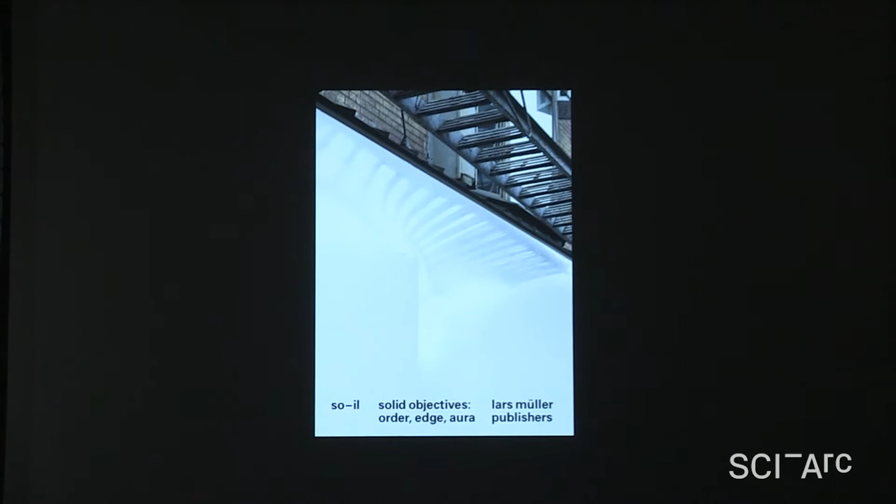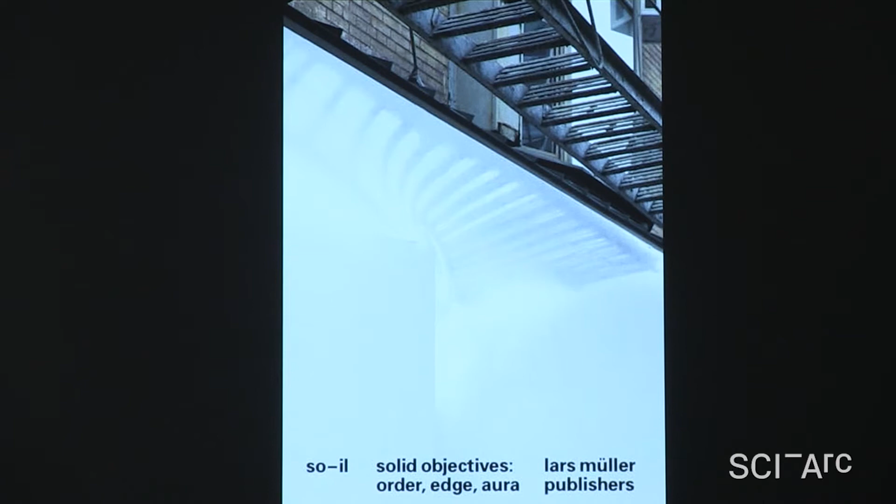We indeed started the office with Florian and me, from different cultures, and now we are running the office with a third partner, Ilias Papageorgiou. And so with 3 people, it's inevitable that we're getting into a lot of discussion. We actually have some of our former staff here, and they can attest to that. Argument and disagreement are part of our everyday life. So indeed, it took us about 3 years to make this book called Solid Objectives: Order, Edge, Aura. SOIL stands for Solid Objectives, Idenburg Liu, and you can say SOIL or SOIL. It's completely up to you.

So the title of this book takes the solid objective, the first part of our name, that hints towards a certain projection and course that we set out to do 10 years ago when we started our office. So in a way, it's a manifesto and birth cry. We did not redraw anything in the book, so we pretty much dumped everything that we did in the last 10 years and tried to make sense of it. So hopefully you have a copy here in the library, and if you have the time, maybe flip through it. I would love to hear your thoughts.

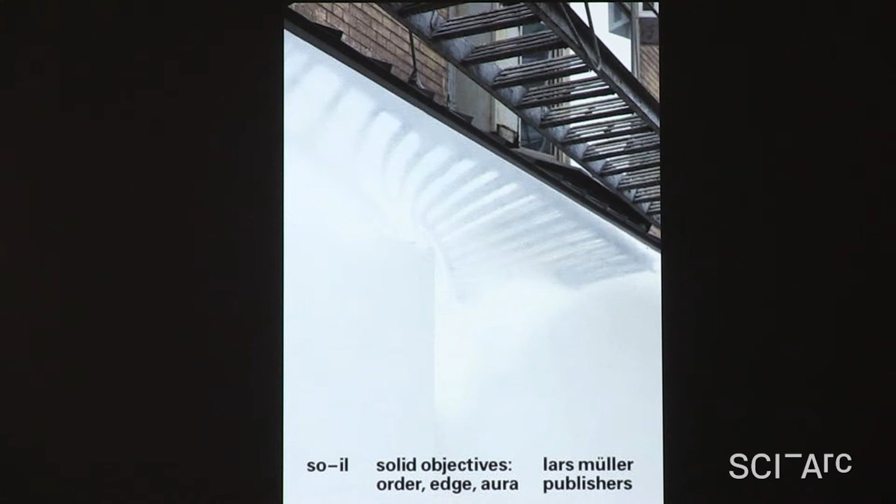Let's see. I put this image in as the start of today's talk because I came to a school that, of course, is very well known for digital literacy and has been at the leading edge of digital technological innovations in the field for a very long time. For us, we started our office in 2008, when the height of the first generations of digital exploration had already gone and entered into a new phase in this development, and also in a moment where there was a financial crash and we were all confronted with the consequences of this speed of information.

So as information and communications are transmitted ever faster, at a speed that's approaching light, we decided to contemplate, instead of what would happen if we take this to the extreme in the sci-fi sense, at least for now, how architecture, this incredibly still tactile and idiosyncratic space, shapes the reality of that particular time and space.

And this is the territory of architecture, at least of today. And this landscape is also incredibly fragile and vulnerable. I think Frank Gehry said a couple years ago, and he did give the middle finger in his lecture at the same time, that 98% of everything that's being built today is pure shit, and there's no sense of design, no respect for humanity or anything else. They are damn buildings, and that's it. And I think there's some truth in that.

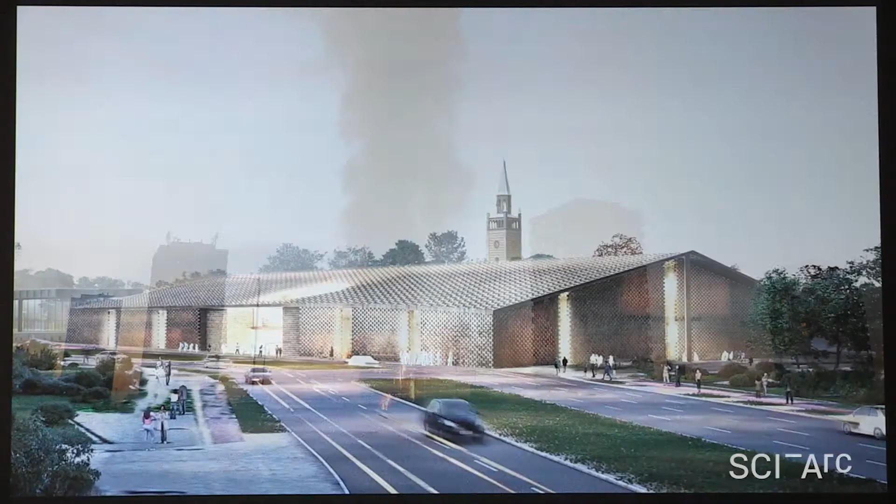Transparency is not the truth that we are dealing with every day, and pure mathematics is not the truth, and extrapolation is not the truth. Every day we stare at the truth in front of us and can't believe that it is so. There's no formula to predict it. And as the introduction rightfully put it, unsettled and anxious, many architects turn to nostalgic, romantically reviving the fads of the past. Apparent simplicity and this early modernist idea of material democracy often become the default to practice in today's instabilities.

So we, in kind of retrospective, looking at the work we've done and trying to figure out what's the territory of our practice, in a broad stroke outlined those three territories: order, edge, aura. And with order, we try to see the plan beyond this operational manual as something that's less determined and more catalytic. And the plan becomes, in this way, an enabler, a device that calibrates relationships, a tool for the production of spatial events. And we try to incorporate elasticity and accommodate contingencies, even in this case, in a Cartesian grid.

This is because to date, the discipline has largely, and in a modernist sense, denied or attempted to escape these contingencies through a retreat to the notion of legibility or efficiency. So we believe that architecture needs to try to incorporate the contingent presences and to revert this overtly reductive approach.

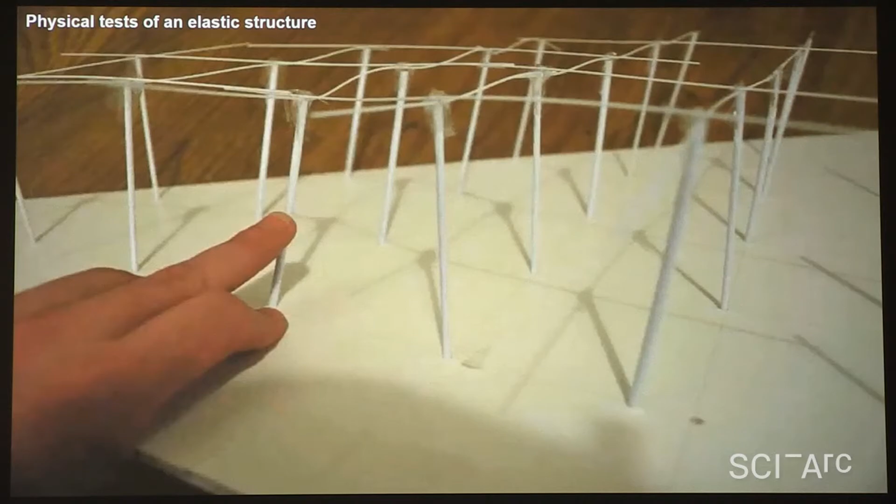The edge, of course, means a little bit of the encounter towards an architectural space that's definitively considered, and there's some intention to it. And we believe that the edge and the frame is very much at the core of the architecture practice. It's the moment where a spatial intention gets transformed. I think at some point in art history, artists have understood that the same piece of artwork can be seen quite differently, depending on what kind of framework is put over it.

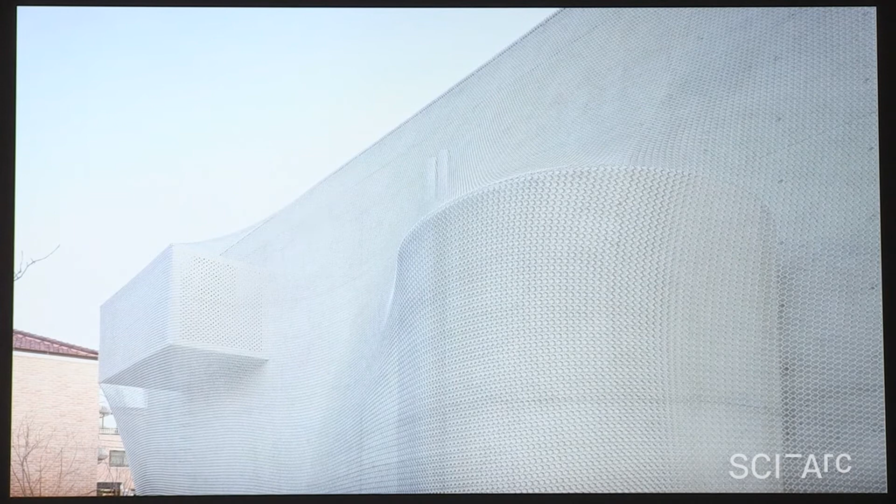I think a lot of the contemporary artists try to not have the frame at all, but in our projects, we try to consider that edge and contemplate that and make it into a productive territory of investigation. And it's a creative act for us, and this boundary that's delineated allows us to incorporate multiple narratives and multiple versions of imaginations all at once when someone encounters that space.

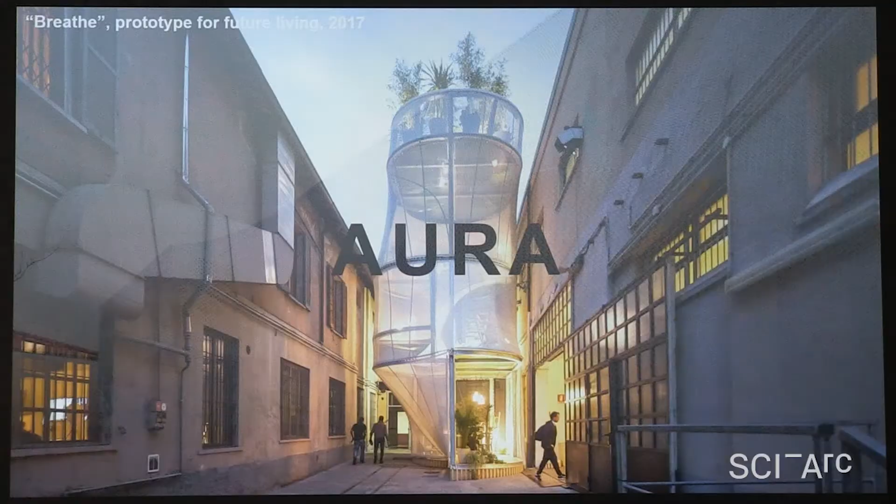And the third territory of investigation is aura. This is, of course, a much debated term when we were choosing if it's about aura, if it's about beauty, if it's about aesthetics, if it's about the character. We chose the word aura because it is, in a way, a very unfamiliar term in the architecture field, and it somehow embodies both an aesthetics and also the characters. Our first installation, which you saw before, of the pole dance, very much referred to Oskar Schlemmer's pole dance from the Bauhaus period.

We believe that these abstract figurines and these kinds of personalities that are embodied in his works can be very productive in establishing interrelationships between abstraction and compression in the architectural space that we create. And objects and architecture who have personalities can help us to communicate and also embody political agencies that are very important to communicate through these shared spaces.

And as we increasingly occupy the available areas on this planet and share them, it's inevitable that we demand our volumes to not address only functional needs, but also narratives and fictions, so that we may inhabit a more joyful and characterful world.

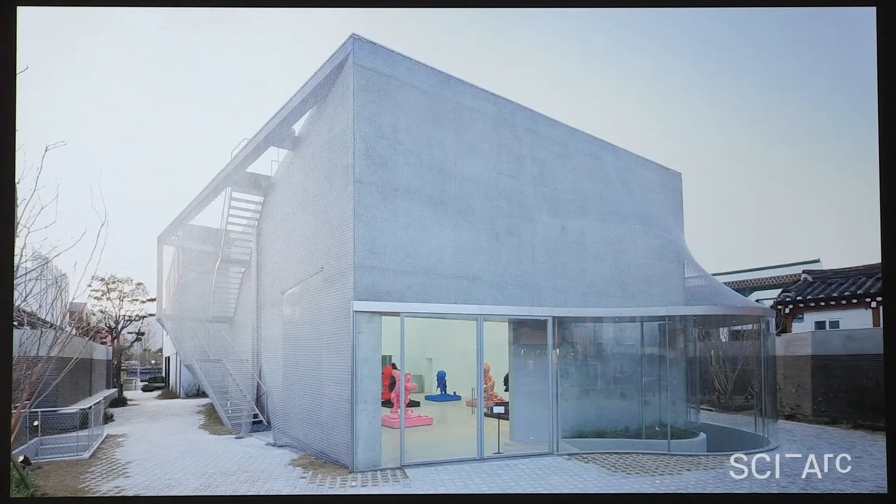So with that introduction, I'm just going to show you 3 projects from some of the earlier projects. This is the Kukje gallery that was mentioned before. And you can see here that it's the first time that this character as a building emerged for us. And I hope that the story of making them would also show very much how the people who make it, the people who we argue with and eventually became the supporter of the project, is very much part of the story.

So this is a contemporary art gallery in Korea, and the site is in one of the most historical neighborhoods in Seoul. It's literally across the street from the Imperial Palace. It's a contested area where a lot of these Hanok buildings you can see around the site, all 1 story tall with masonry foundations and timber structure above, occupy that entire neighborhood. It's very close-knit.

Everything is very intimate. And then in recent years, with this kind of global art market invasion into this neighborhood, there has been a big contested political background to add to the foundation of this project. Our client was an art gallery. They wanted to make the biggest possible gallery box, functionally speaking, in this neighborhood.

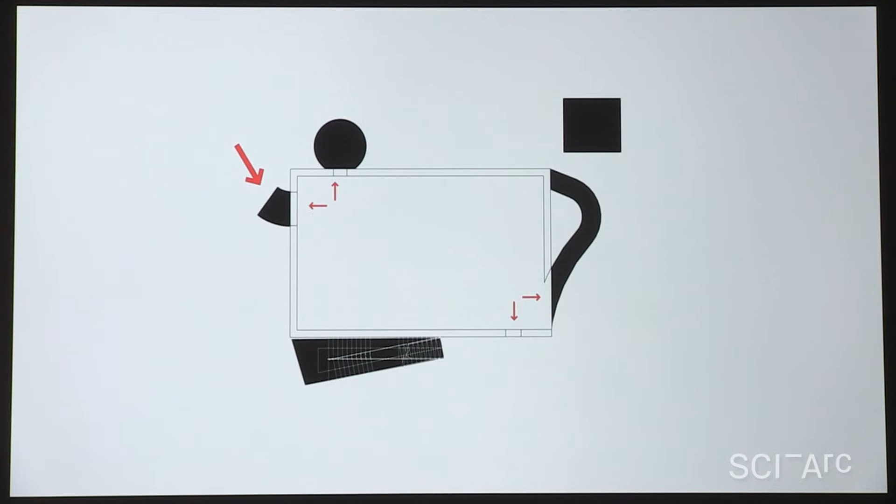And still this, although characterful, still had a harshness and a little bit of awkwardness in the neighborhood. So we thought, how can we soften this even a little bit more, and create some of the tactility that these older buildings embodied as well, but not to rehash that and not to copy that, but to approximate the same aura in a way.

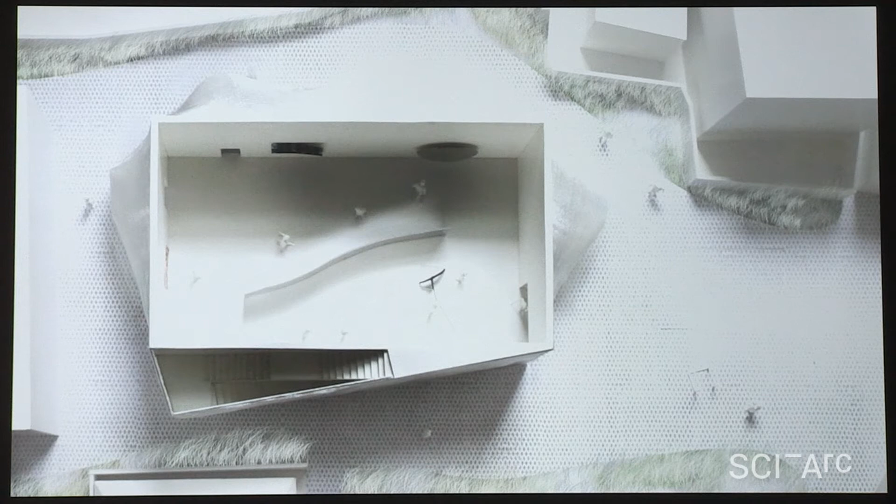So in our first exploration, we wrapped the entire building with this stocking material, which was very elastic, and it created these double curvatures and softened the concrete volumes through its sheen and elasticity. The client, of course, had been working with a lot of artists, so crazy ideas were not very foreign to her. So she liked it immediately when she saw this model, but didn't even ask what this stocking material was.

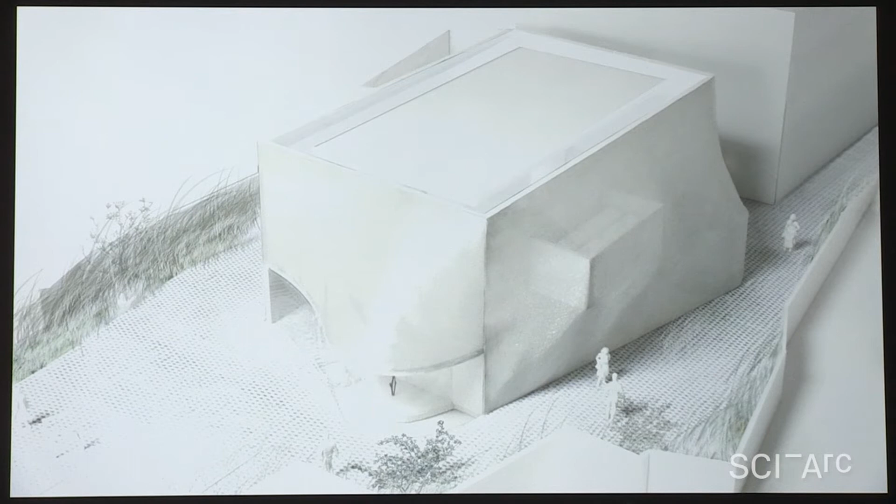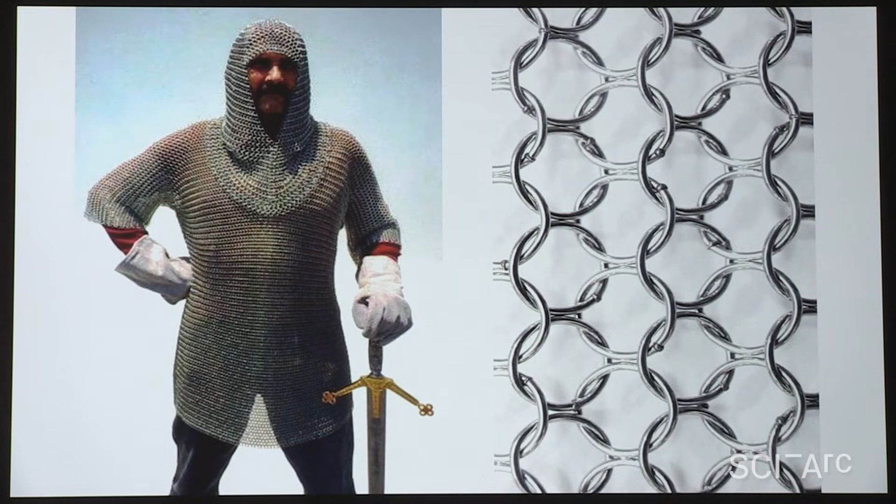So we had to figure out what this soft and seemingly immaterial envelope was going to be. And that answer came out of a trip to the Metropolitan Museum with my kids. She was studying medieval history, so we were looking at the armor there. Of course, this is not the one in the Metropolitan Museum. But we thought, this is the similar thing we're trying to achieve: something very simple, but through the aggregation of a very small unit, through the way they're interconnected, elasticity can be achieved, while the material itself is still very strong and viable for architecture.

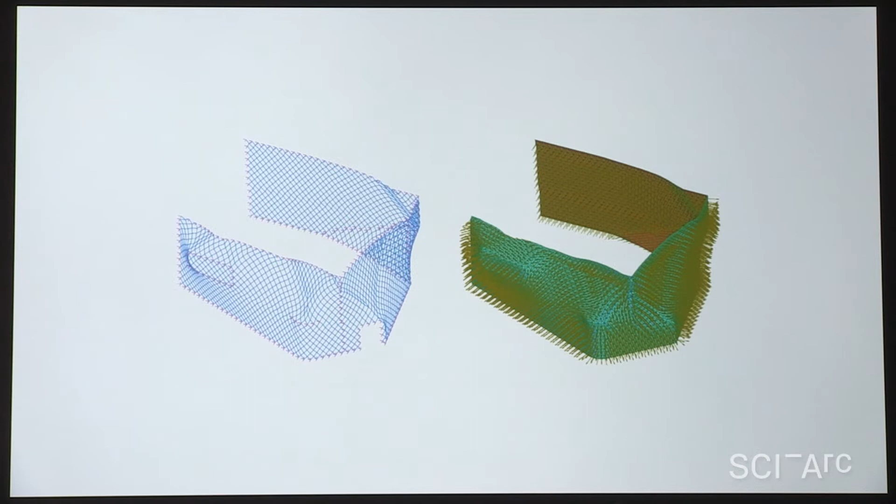So we started to experiment. Of course, this doesn't exist in your spec book or off the shelf. So we started to investigate its possibility through working with engineers and material laboratories, looking at the tensile strengths and the breaking points of a welded stainless steel ring, and we mapped that all in the computer, simulated how the stress force would work over the entire building, and learned so much hypothetically, through formulas and mathematical principles, about this mesh.

So it seemed very real in a computer, but we still didn't believe in it, and we wanted to see how it really behaved. So we ordered from an Indian belly dancing supply company this big stainless steel metal mesh for a 1 to 10 model in our office, and immediately you see the wrinkles and the difficulty of draping in this model. But it was still a very comforting process.

But we also realized that this is 1 to 10, so if you scale it up 10 times, inevitably there are many other installation complications that will come into play. But with these kinds of things, we always try to solve the problems one step at a time. So first we figured out conceptually what it would be, and then digitally how it would potentially perform. And then through the 1 to 10 model, surface some of the problems that might occur.

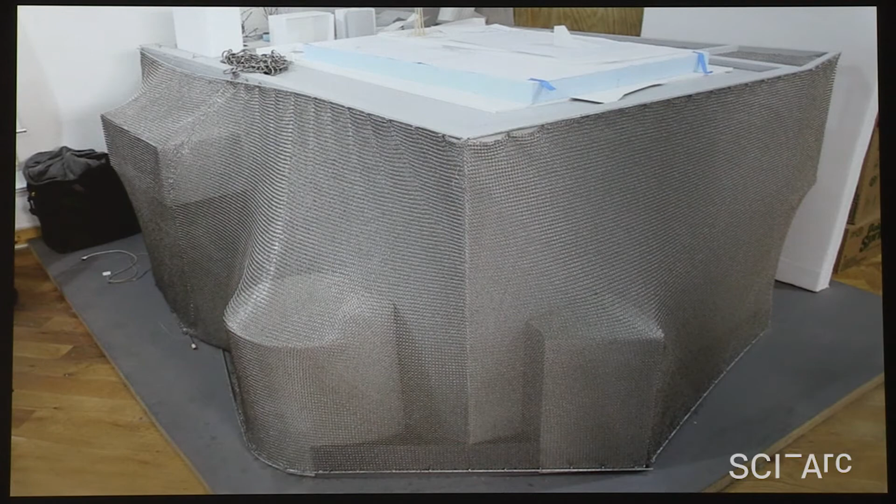And then that's the moment that we go to the market, in a way, and go to the world and try to figure out who can actually go on such a crazy trip with us. And Alibaba at that time was still a new thing.

My father was a trader in the 80s, trading all kinds of stuff between China and Japan. And he lost his job in 2005 precisely because of this kind of portal-to-portal business. So for me, it was a little bit of a betrayal of my father to be using Alibaba. But I saw the potential of it, and we went on Alibaba and saw that there are so many factories just eager to show themselves and exhibit their skills.

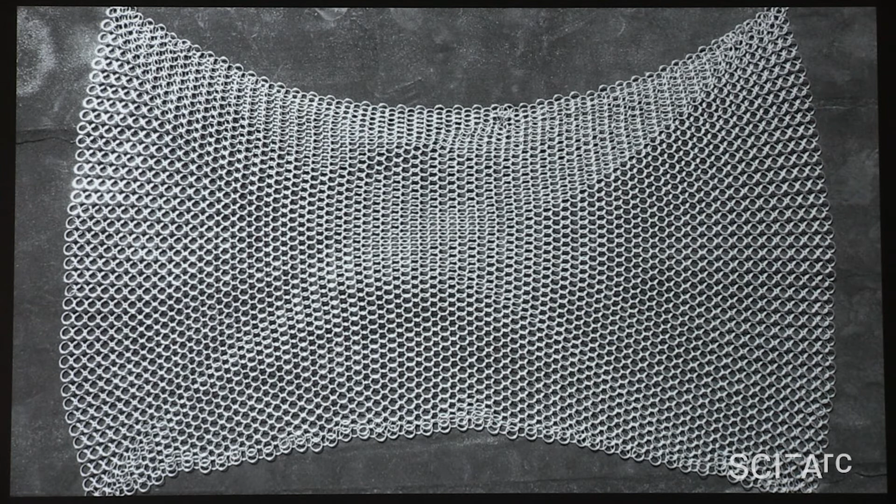And we found that there's a town in China that had 2,000-something factories that all produced stainless steel materials, mostly for oil refineries. So architecture is something completely unknown to them. And we started to chat with one of the companies, and they were very eager and sent us this sample immediately, which again was a very big step forward into this unknown territory for us.

This was, I believe, about 3 meter by 1 meter, or 2 meter by 3 meter size, completely hand welded, because the material for belly dancing is made by machine, and they're all butt jointed. So to scale it up to the scale that we needed for the tensile strength, it needed to be hand welded. So at least looking at this, we thought, okay, this is possible.

Then we decided to go visit the people who would be making this for us. And we arrived at this village, and we realized that this is not really the so-called land of stainless steel mesh, but really a factory town without any social infrastructure, and it's 2,000 not factories, but workshops, because the factory that sent us the sample was in this kind of setting, with trees coming out of the welding tables. And literally when we arrived, we saw how they were welding our stainless steel, just having a bunch of rings in front of them and doing one at a time without even glasses, as you can see.

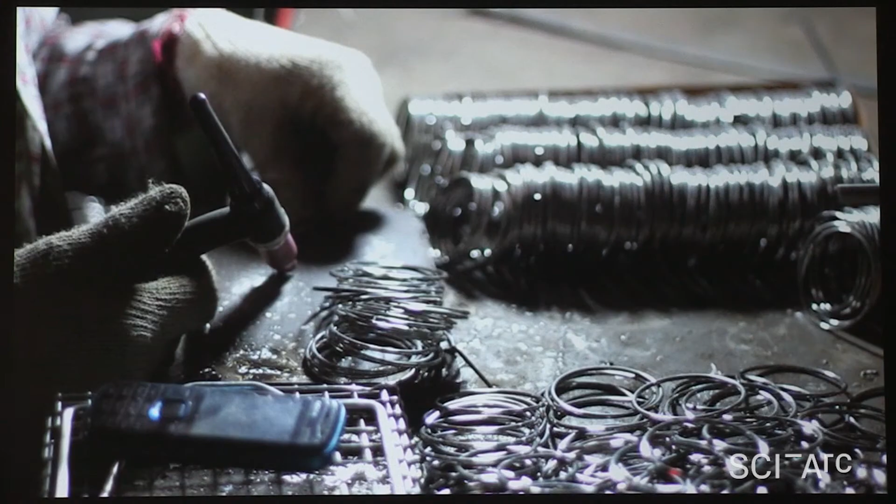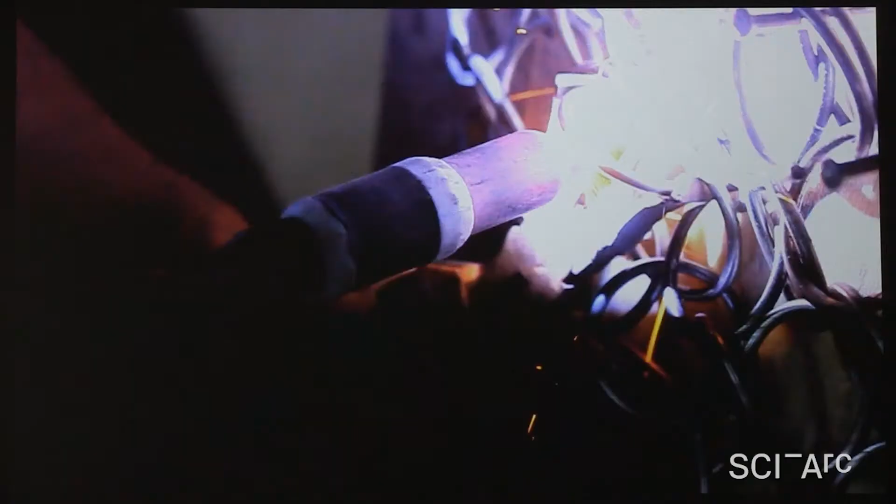So at the end of the day, we got a lot of cousins together and devised a whole process of working in different remote locations, each one with these panels on a plywood easel so that you can see what you're doing, not just a bunch of rings scattered in front of you. Because when it's quite a big piece, it's very easy to link them differently by mistake, not the way they're supposed to be linked together. And you can't see your mistake if everything's bunched up.

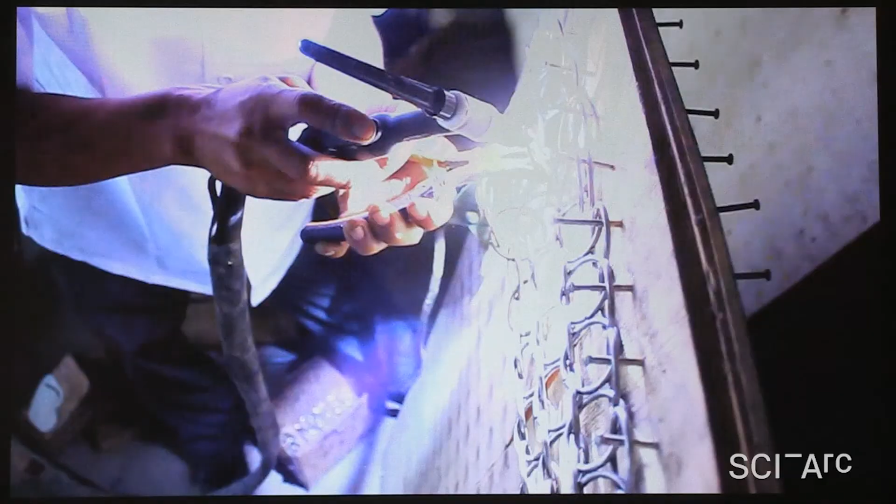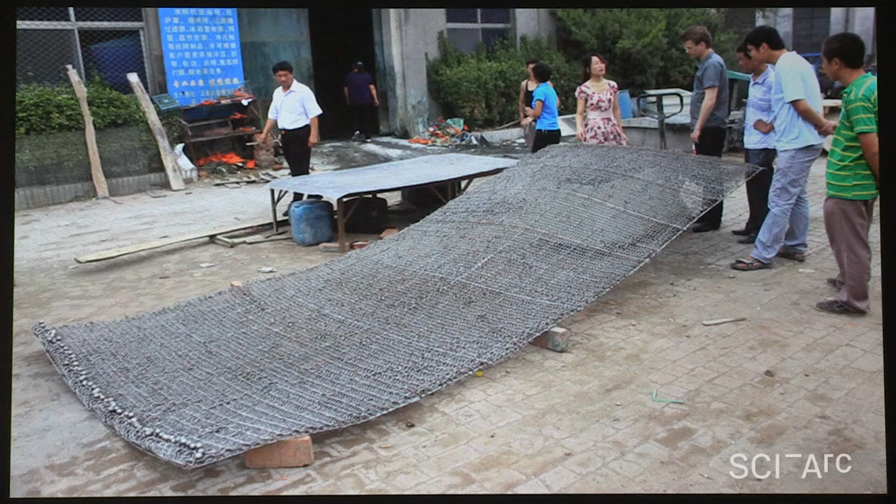So we devised this whole process together with all the cousins. And then they can work simultaneously in different locations. And once the small swatches are done, they can be stitched together, the same way that each ring is welded next to each other, so you never see the seams. And we also rented the local car wash to wash them and process the finish.

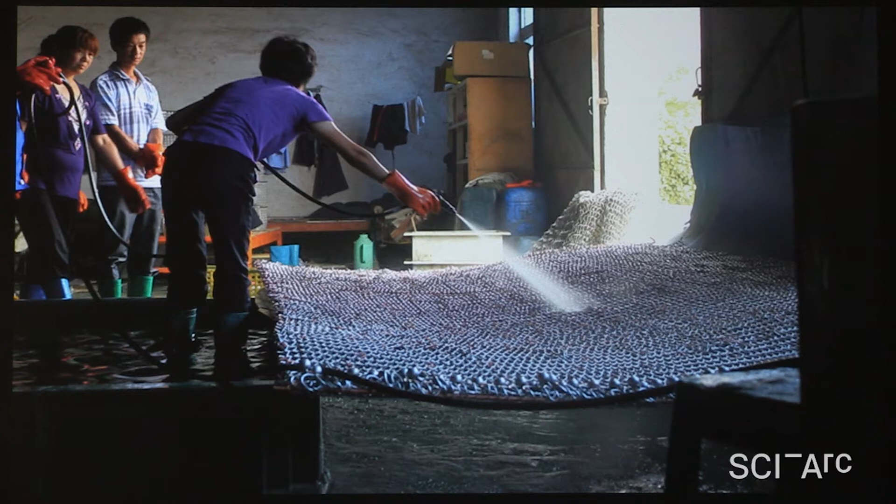And then once the medium swatches are done, they can be stitched together to these large pieces. And we rented the local schoolyard to do the mock-up as well, and had the school children be our inspectors. And I think it passed them very well.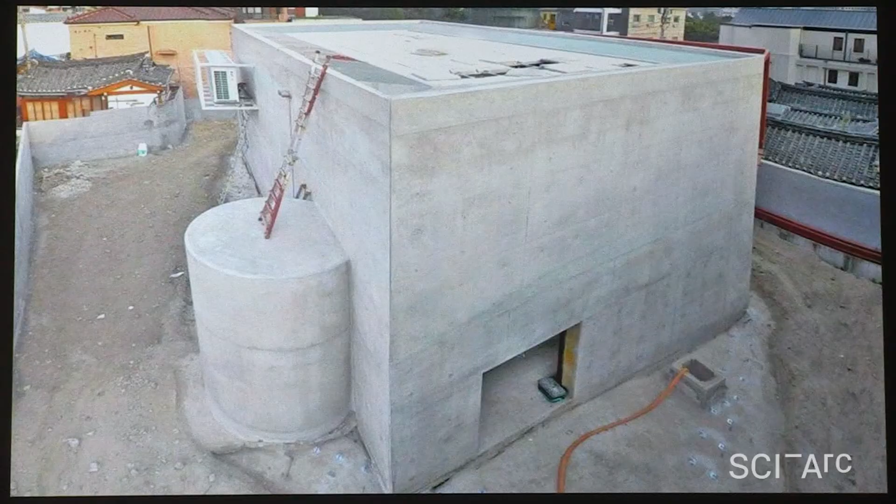And then when they got on site, at the same time, during those 8 months, the concrete was poured on site, and you can see the scale of this building being quite comparable, a little bit bigger than the typical buildings around it. So at this moment, there's still this crudeness and the harshness to this character.

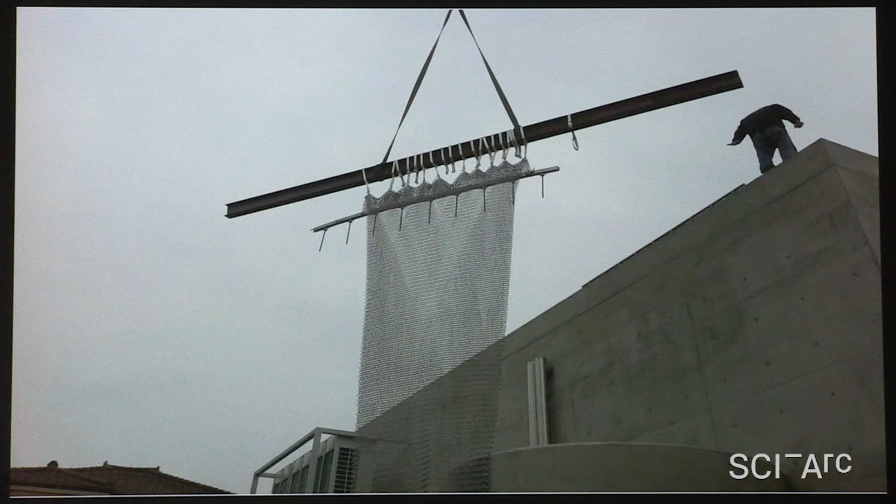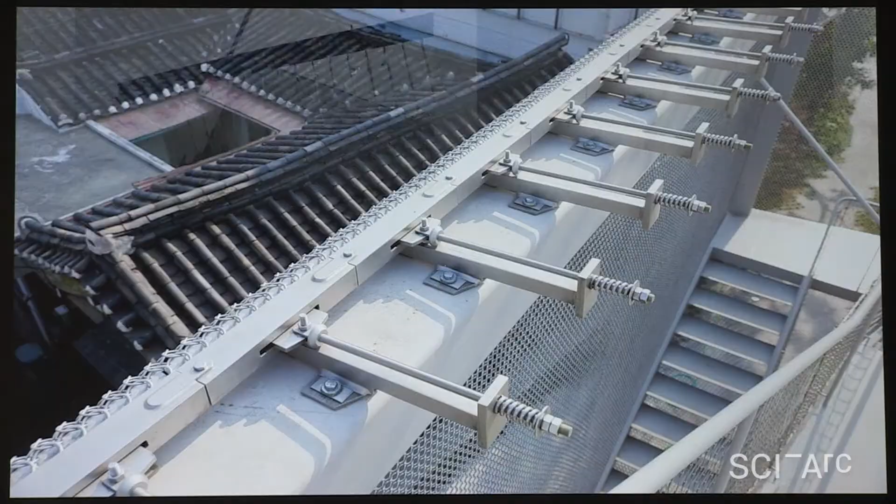In the middle of the winter, this chainmail mesh arrived. There are 16 swatches that arrived on site because each swatch is so heavy that you cannot create an even bigger one without a big crane. And this neighborhood is so tightly knit that we can only get a mobile crane into the site. So 16 of them get pulled up to the top; they are basically fixed at the bottom, pulled up to the parapet, and then tensioned at the top with the springs.

I like this picture very much because somehow, although it's stainless steel, the handmadeness of the whole mesh also resembled the labor of making the tiled roofs in the neighborhood. There's some kind of similar rhythm in this conversation.

So these initially very crude concrete boxes became much more malleable and elastic, and took on a much softer character as a result, and the light falls onto it without casting very harsh shadows at the end of the day. And then this double curvature that you can never predict in the computer was achieved through the material character.

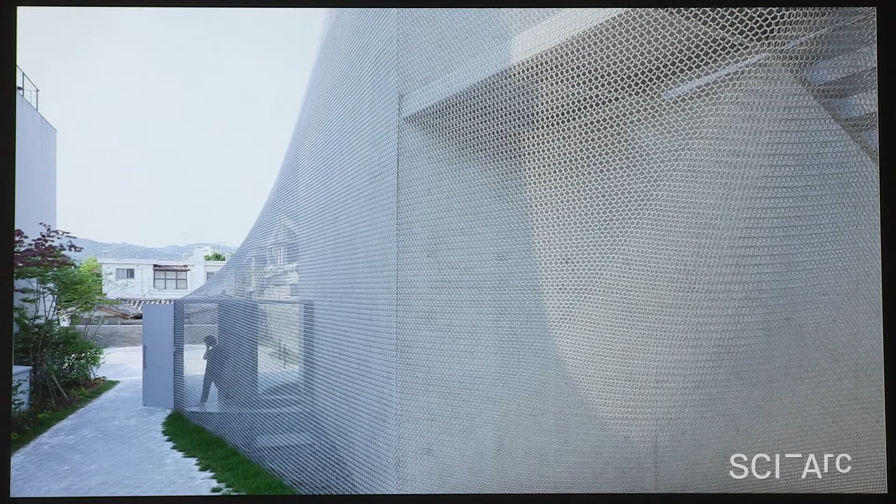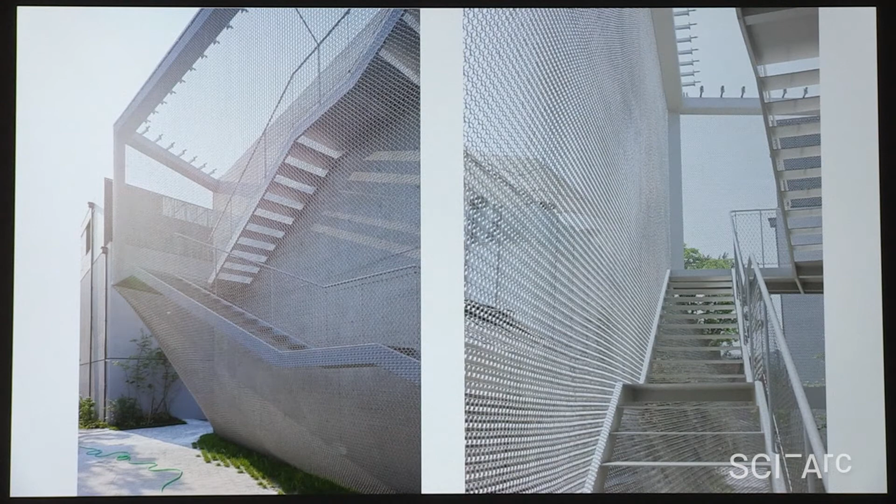This is a private gallery, although accessible to the public at any given moment, but still, as you can imagine, contemporary art is still, in people's minds, a highbrow activity. So by reversing and putting some of the supportive elements outside, we tried to give it a little bit more publicness in this program. This is a staircase going up to the roof, and this is a staircase that went down to the theater underground.

So this project gave us a lot of... For the PS1 project, we also made a very elastic structure; we told MoMA that we wanted to make a structure that's on the verge of collapsing, and pulled that off. And then on this project, we told our clients that we were going to deliver 500,000 hand-welded rings in 8 months, and we pulled that off. So that gave us a lot of confidence to keep pushing for crazy things in the world.

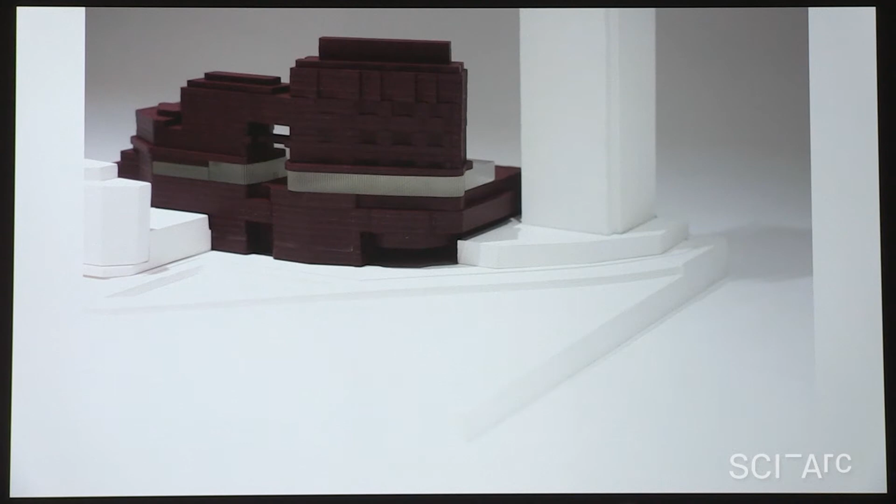So the biggest question then, and it's an incredibly difficult question, is how do you insert something in there without it being engulfed by all the activities around itself, but also, in a way, establish a dialogue with it without it just being scared and shutting itself away from what's happening around it.

The museum is on these 2 floors. It's a double height space museum. And we had the privilege to redo the facade of the building completely. And so by inserting something that's very ephemeral and abstract, but that also spans this entire double floor, we thought that the museum can, in a way, blend itself into this very commercialized quotidian of urban life, but it also creates a different scale to introduce a certain monumentality that's soft and transparent in this context.

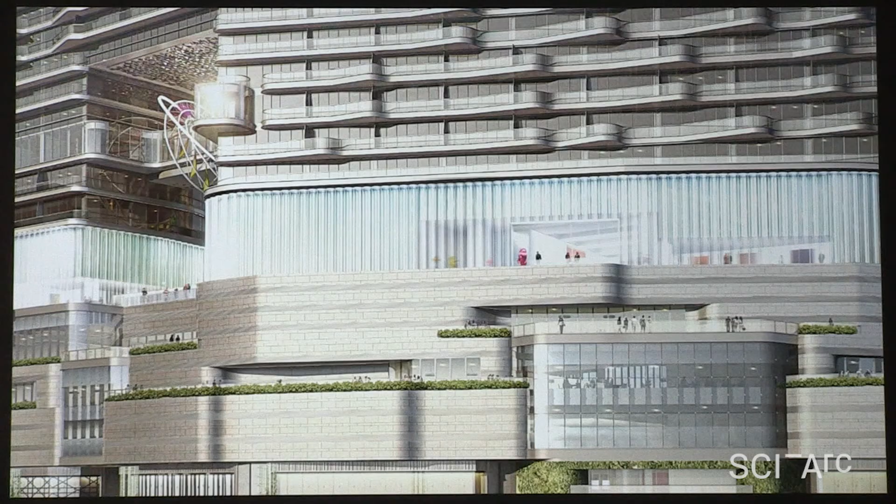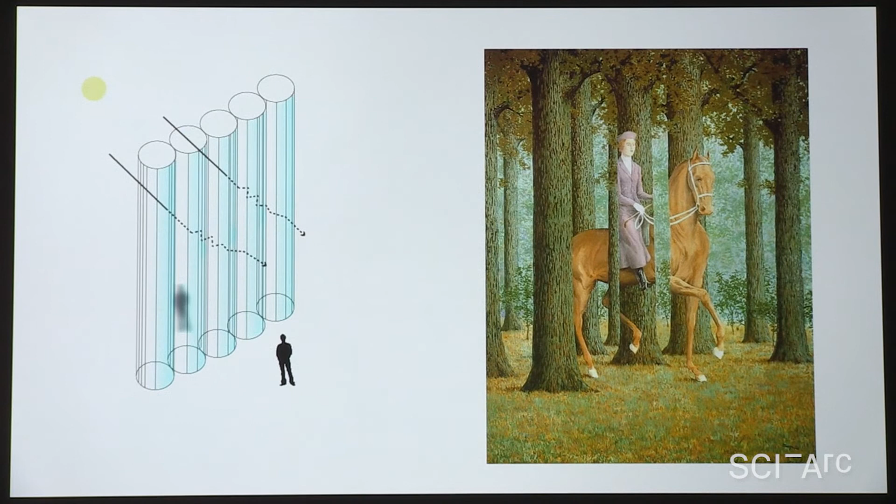So at a close glance, these are 9-meter tall glass tubes, glass columns that replace the curtain wall systems of the building, and they're loaded onto the deck of the podium. They're all structural glass, and they span 9 meters, the entire height of the museum. Because of the diameter and the tight curvature of the glass, we were hoping that it would create both a revealing moment, but also a hiding and discreet effect.

These are earlier study models that approximated the effect that we're looking for. So from the outside approaching the museum, or from another building across the street, you can somehow see the activities in there, but it's not completely revealing.

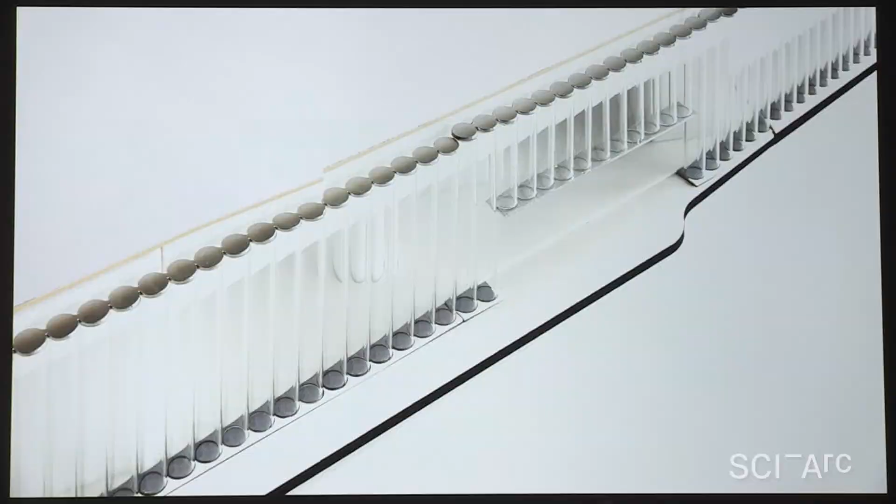And we also pushed all the amenities of the museum to the center plaza, which is on the 6th floor of the building, so that this plaza is all publicly accessible. And on the plaza, you can see the view of Victoria Harbor, but also a glimpse of some of the programs inside the museum. So the cafe and one of the entry galleries face that public plaza. And one of the galleries has its view towards Victoria Harbor as well.

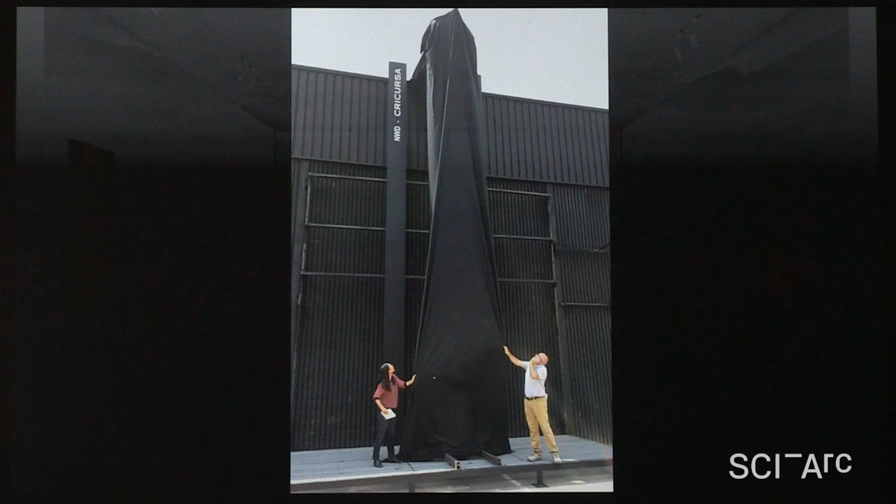So all the galleries are slightly recessed or tucked in inside the perimeter of the museum, giving the perimeter more to the publicly accessible areas. In the beginning, we, of course, kept it open whether we were able to achieve these 9-meter tall glass columns. We investigated many ways to bend the glass, extrude the glass, drop the glass, and they all had their own limitations. Sometimes you can only do half glass, sometimes the diameter is constrained.

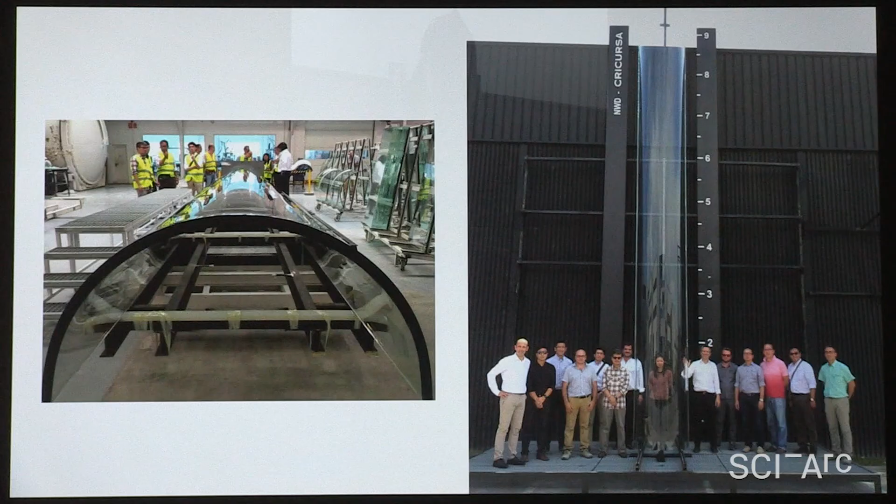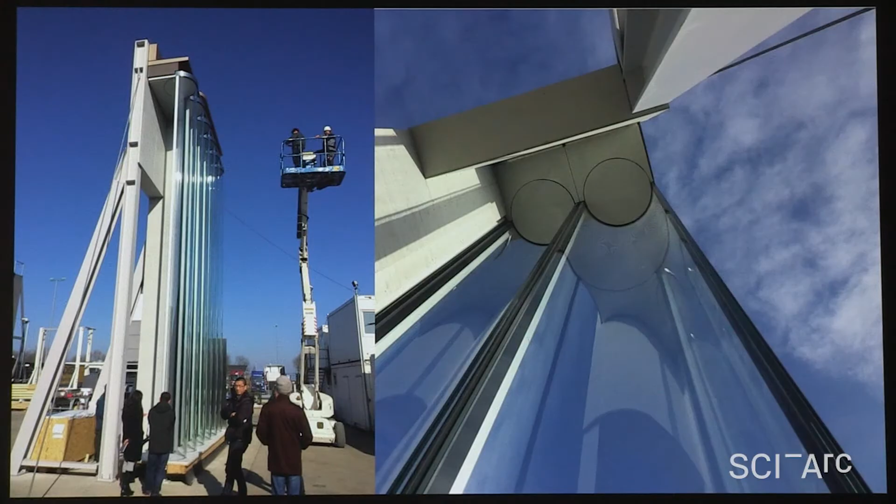At the end of the day, we chose annealed glass that's bent from a single flat sheet, and it takes about 8 hours to bend the glass into the tight curvatures that we were looking for. It's about 1 meter diameter, and the glass is 12 millimeters thick. Half of the tube weighs about 1 ton, so the entire tube is about 2 tons. So it's an incredibly monumental effort, and this is one of the first mock-ups that we did, which again confirmed that sometimes crazy things can be done.

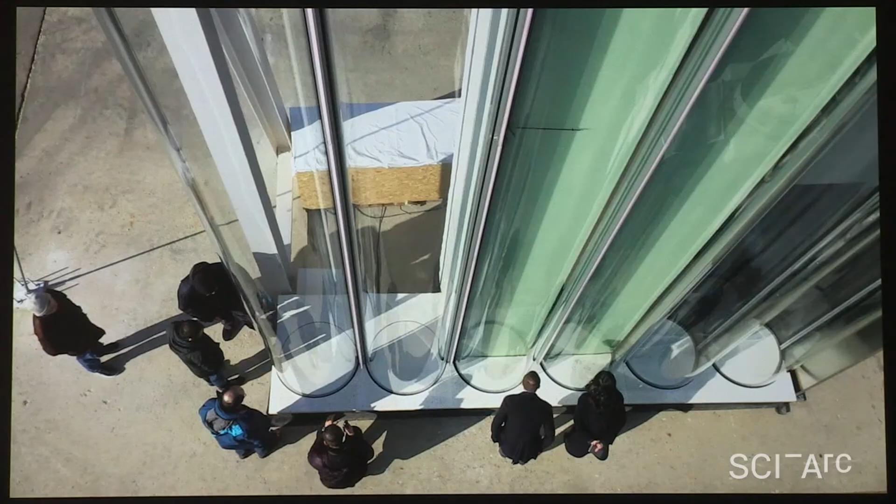And because the tubes are full tubes, they're completely sealed. The amount of air that's trapped in this, in a way, very big IGU unit is a lot. And in the very tropical climate of Hong Kong, keeping that amount of air at a stable humidity level is very difficult. So there's constant dry air pumped into the tube to keep the air at a constant humidity level. So it looks quite minimal, but there's a lot of work that goes into it for it to look so.

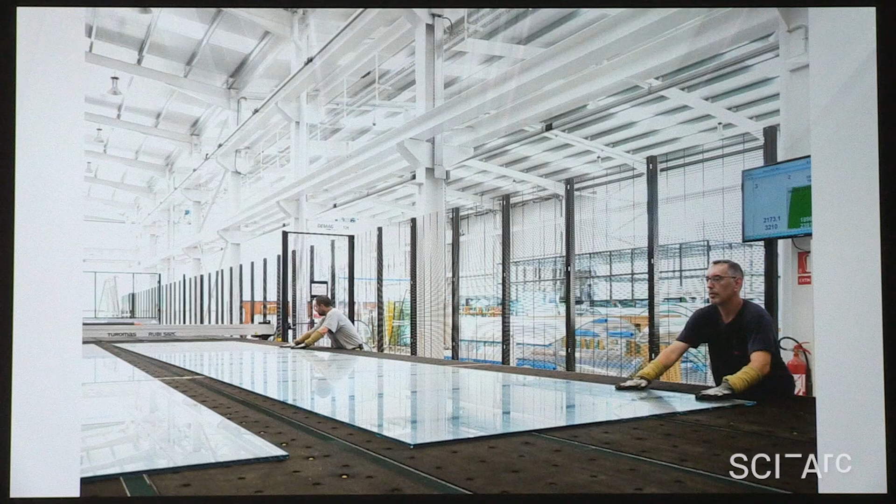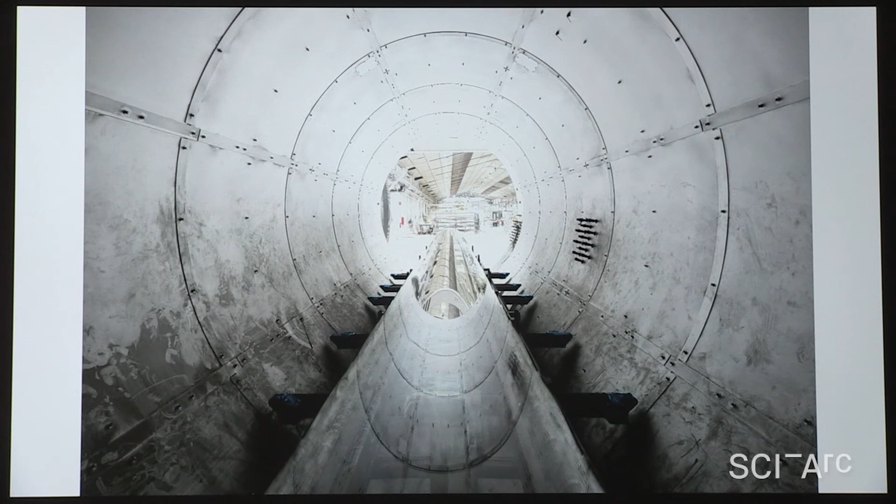This is in our glass fabricator's shop. What was amazing is that if you push the size of glass to that level, there are very few people that can handle it because it's so heavy. And a lot of it is really computer processed. From the moment the flat sheet of glass is prepared on this motorized and automated track, to sending it into the oven and putting it onto the mold, everything needs to be computer monitored. As you can imagine, over the course of the 8 hours, the glass wants to do its own thing. It wants to slide, it wants to shift, it wants to bend. So it's an incredibly precise process.

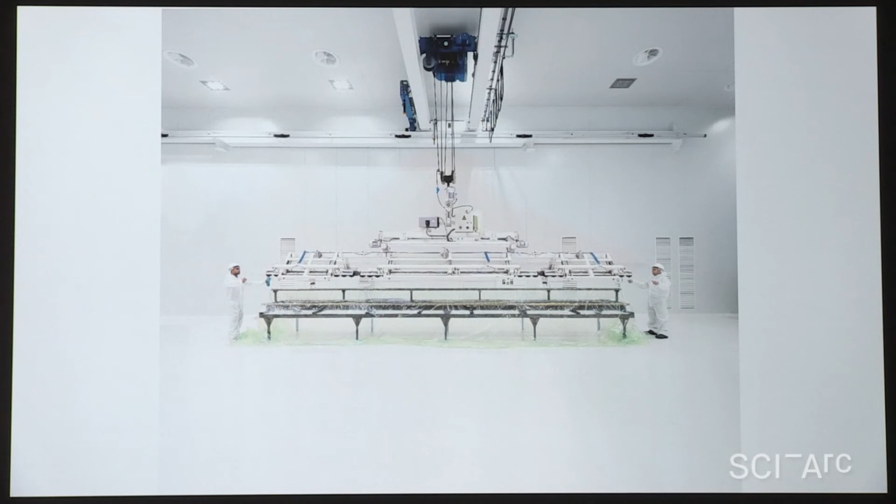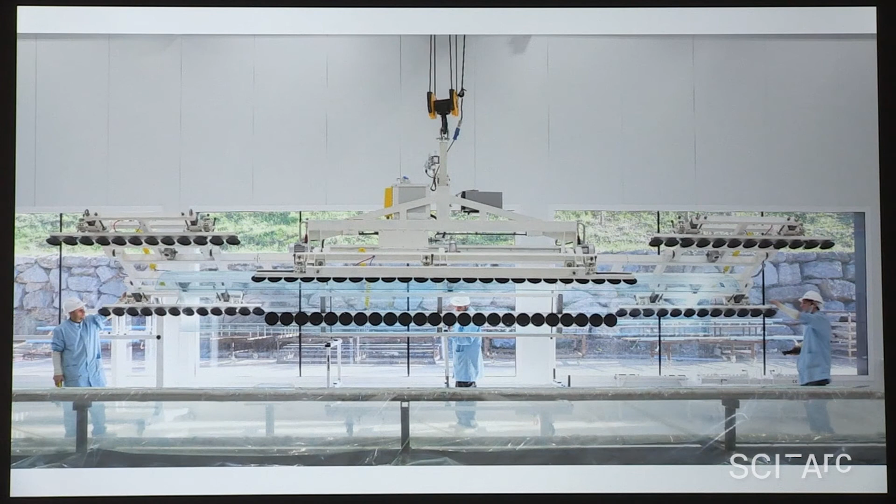I think our fabricator, Cricursa, had to create a new clean room and staging area for the production of this project, which was very exciting for everyone, to kind of push the limit of what glass can do under heat. And here is some cleaning the glass.

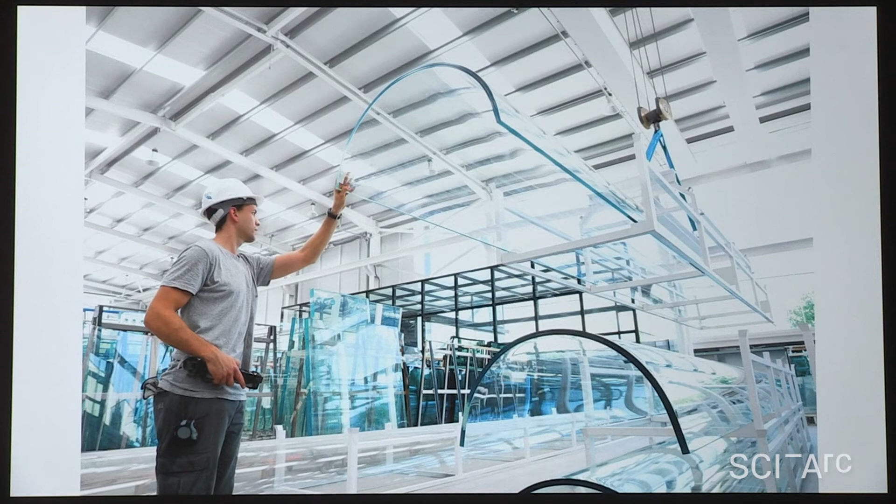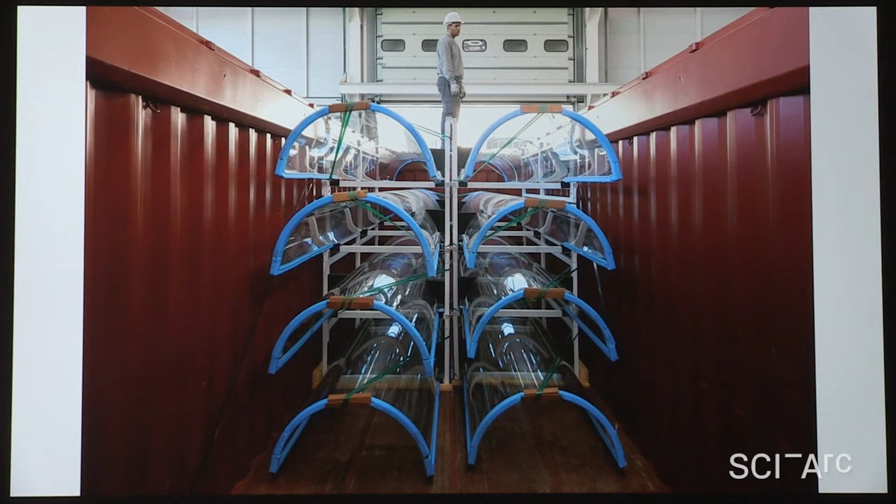There are 475 of this glass being produced and shipped to Hong Kong from Spain on this container. This was only possible because our site is on the harbor, so we don't have to drive the container into the very tight streets in Hong Kong, and we were able to just deliver the container right at the harbor and pull it up.

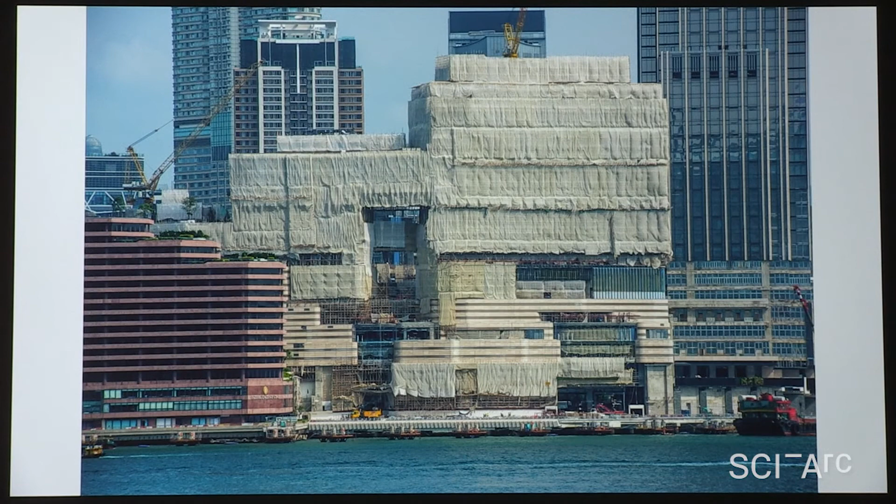So this is the construction site a couple months ago, and now we just finished the exterior before the new year. So I'm very excited to see that in 1.5 years open to the public.

I think the last project I'm going to talk about is also in California. It's the Manetti Shrem Museum on the campus of UC Davis. This is one of the first big competitions that we won. The process of the competition was a design-build, which I believe is the first design-build museum ever done in America. And design-build is a process that is typically notorious for phasing out innovations, and there are so many other priorities in that process that make innovation and design quite impossible.

So maybe it's out of naiveness that we entered the competition, and maybe out of naiveness that we seemed so confident and positive during the competition to be able to do this. It was a $25 million project, completely set. The UC system is very stringent and very good at monitoring and making sure that 25 million is the max for the project.

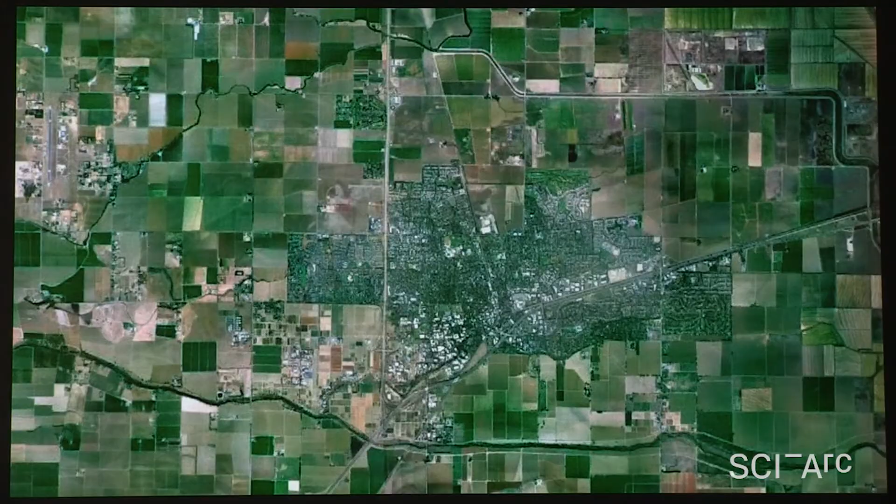So UC Davis is this 1 square mile habitat inside this very regulated agricultural landscape in Northern California. And the landscape there, as you all know, is getting drier and drier. It is still a very productive land, but the land has been cultivated and feeding humanity for a very long time. So for us, this idea of engaging the environment, but also the productive landscape in our new contemporary narrative, was very important.

So we took the motif of this agricultural landscape and this patchwork of different productivity and drew that onto the site using some of the connections and the vistas that we wanted to maintain. And the plan became more of a patchwork and a quilt of, I wouldn't say programs, but more activities that differentiated from each other, but also in a way had a relationship with each other.

And literally, rather than drawing a typical plan, we inserted all the activities that were supposed to take place inside the museum in this patchwork and different portfolio of spaces. Some are more rectangular and some have a more curved space, and some are facing one way, some are facing the other ways.

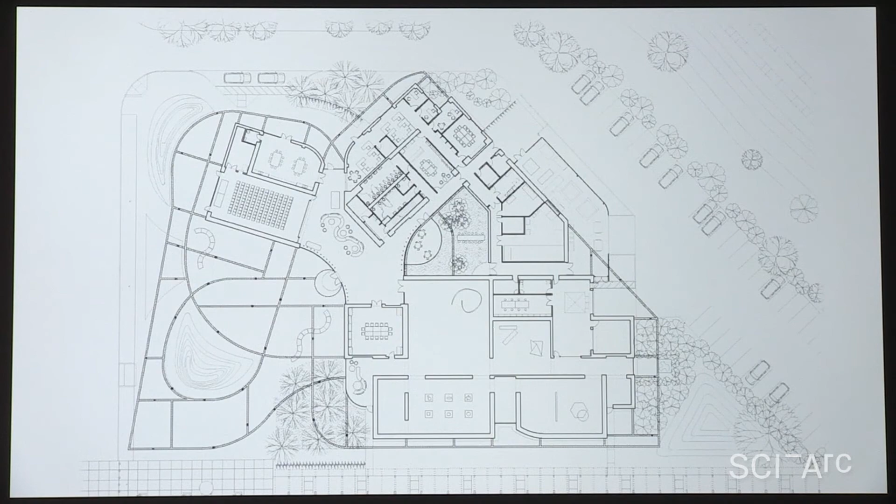So the plan became something very exploratory and very open, and by doing that, we were able to also incorporate a lot of outdoor space into the building itself. Again, I think if we had a little bit more experience, probably it would be something that under the framework of design build, we wouldn't have dared to do, but we thought this was the right thing to do without thinking too much of it. So we proposed this grand canopy that covered the entire site, and the building itself kind of spread itself out under the canopy.

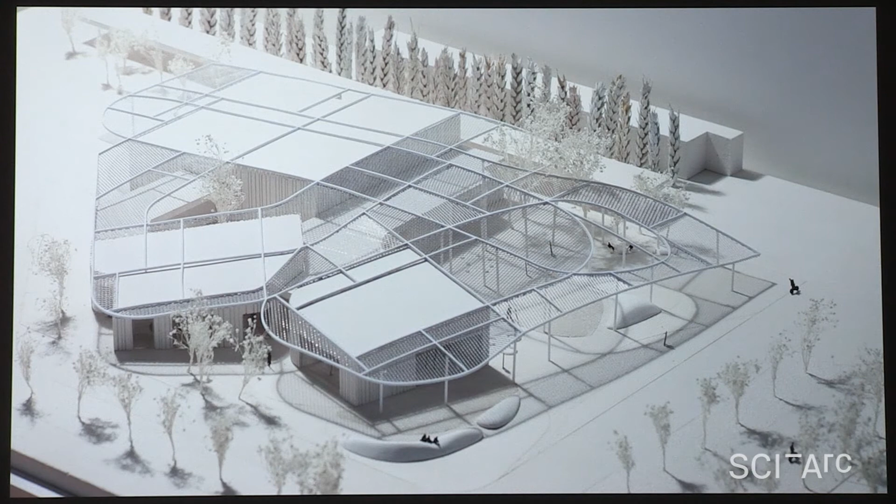And our partner of the construction company said already during the competition phase that it is maybe a little bit of a stretch, but let's give it a try. So we won the competition, and at that moment, the canopy was reduced to the simplest beam, and I think the contractor even predicted that we would unbend all these curves that we drew in the first iterations and make them all straight beams. But we pushed to the other direction along the way.

The canopy was supposed to just be beams with steel joists and infill of the cheapest metal mesh. We thought that it was very important to have the canopy do the things that the tree canopies would do, have people be connected more with the sunlight and also the harshness of the sunlight, but also this giving the sunlight as an energy-giving force, very much informative of the productive landscape in Northern California.

And if you look at the tree canopies, there's this layered transparencies and movement in the tree canopies, and somehow under that canopy there's this animated presence of the nature kind of falling on you. So we wanted to very much recreate or simulate that experience.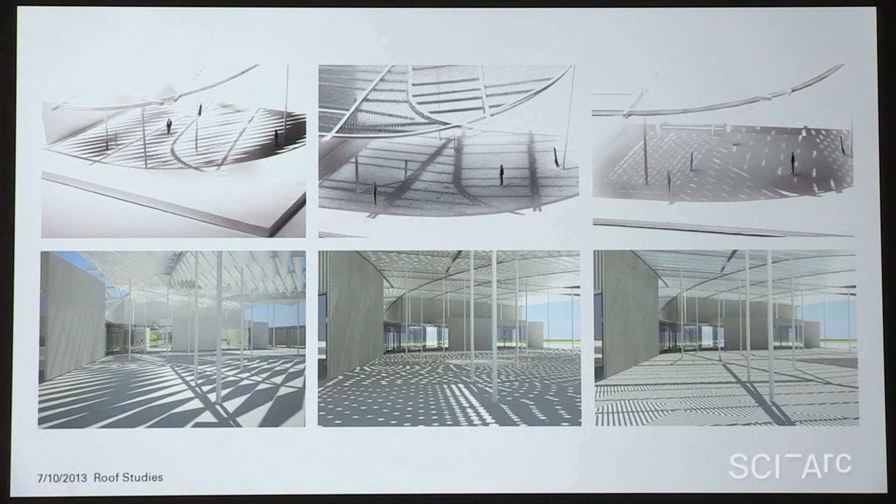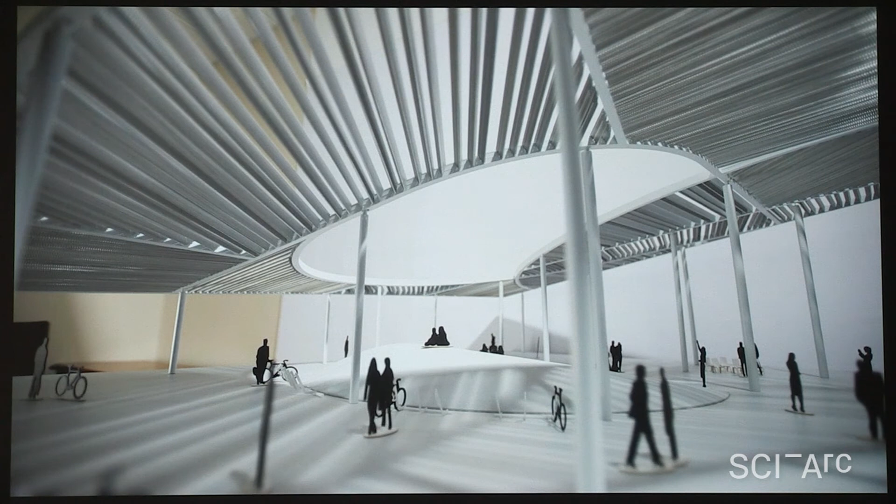So rather than just a simple sheet of perforated aluminum, we started to, against everyone's advice, especially the contractor's advice, dream of different ways to make it more nuanced and more animated, through patterns and maybe three-dimensionality. And we ended up with a solution that both saved more money for the contractors and achieved the more nuanced shadows that we were looking for, which was to get rid of the secondary beams and just use these perforated metal sheets, but bent into a triangular profile so that they become structures themselves and they can span up to 30 feet because of this section.

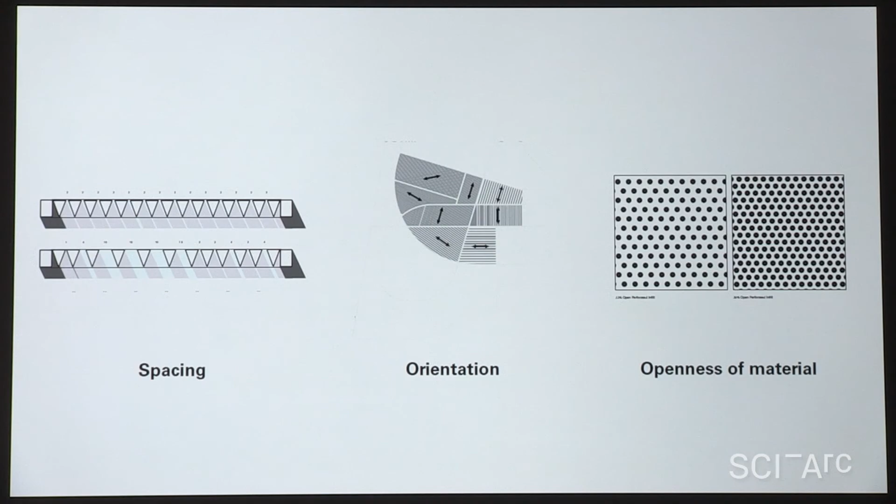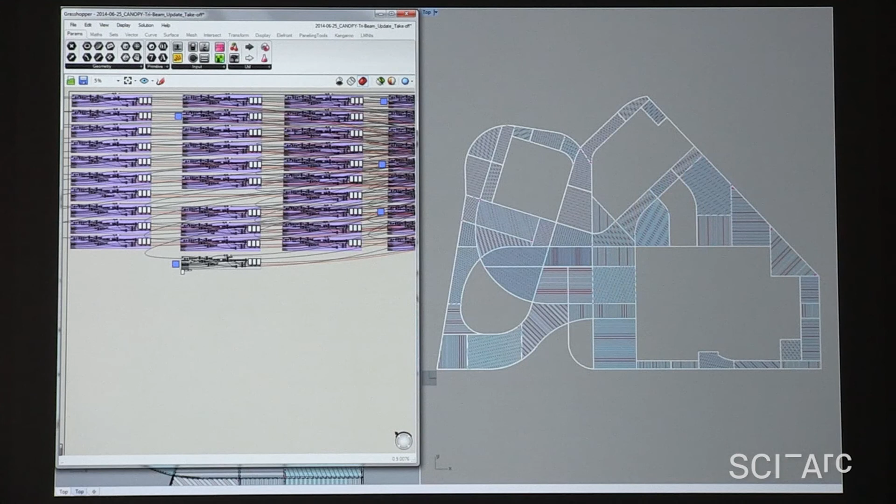And by the variations of the densities and also the different directions of these pieces, we were able to create different kinds of shadows underneath it. And because it's such a simple profile, it was very easy to also cut it in different lengths and play with it in Rhino and simulate the shadow that it would create on site.

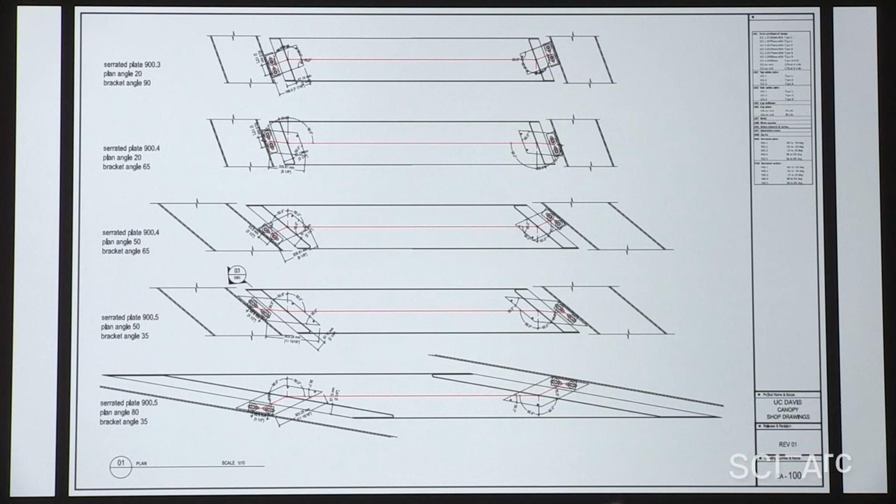And it was very easy also to create mass-produced variations with very well-controlled documentation. So we sent these drawings to the fabricators in China, and at the same time, similar to Kukje Gallery, while this was produced, the concrete was poured. This is a prefab concrete, so not in situ, but we worked with a highway contractor to produce these very simple prefab panels that would be used as the exterior envelope for the interior space. And while this was constructed, the canopy piece was fabricated in China at the same time.

The seismic of California made the columns a little bit fatter than we had hoped. But I think our client actually liked the fatter columns because she was the importer of Italian fashion back in the day. So she said, a column needs to have strength, it needs to be powerful. And somehow that was to her taste.

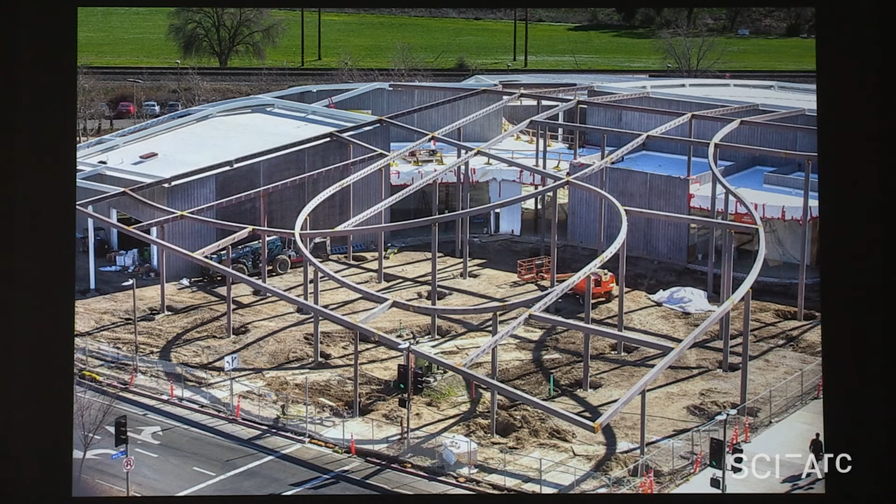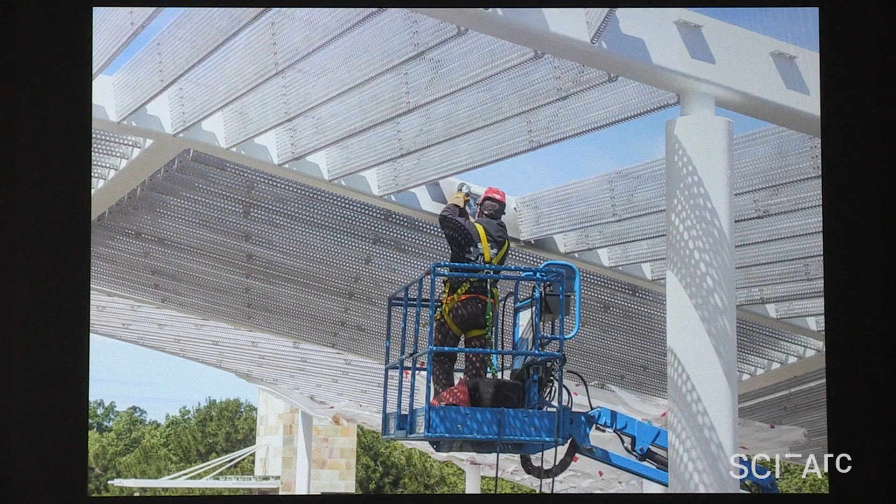So we were able to, from the savings of the infill piece, maintain all these double curved beams on site. And concurrently, this was fabricated, shipped, and because they were all numbered really precisely, we were able to install all the canopies within 2 weeks. And they're super lightweight, so a person can do that on the cherry picker. This is the effect that we were very much hoping for and achieved through this very simple solution.

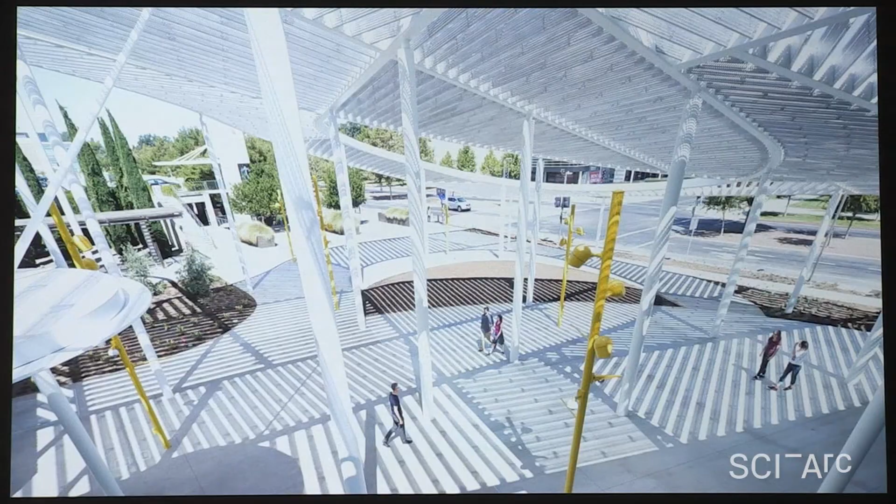So this interaction between the patterns on the concrete and the canopy created even more variations on the walls. There's no one stable moment under the canopy or inside of the building, because the sun is constantly moving. You're always aware of the passing of time here.